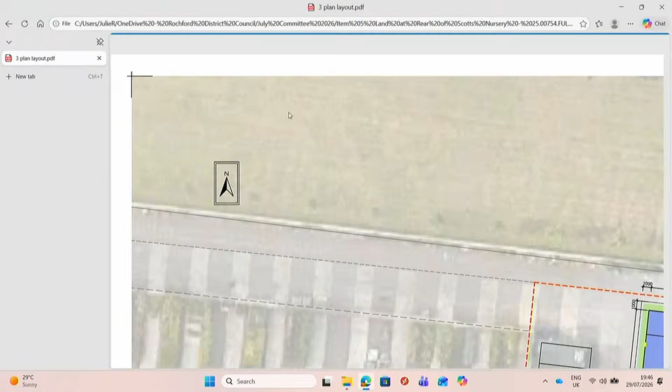And if we can jump to the three-plan layout, please, this is what's proposed. The blue areas that you see there - I'll try, Chair. Yeah? Okay.

What concerns us here is the planning application made for the access areas you can see in the grey triangle-y area at the bottom. But what we're interested in is the 5 blue rectangles, which are the paddle courts, which is what's proposed. These paddle courts are enclosed, which I'll go into. But bear in mind the location of those paddle courts as we go through the slides in relation to what you've just seen - the area at the back of the site in sort of casual storage, and the next slides to follow.

The whole site is located within the Metropolitan Green Belt. Although the provision of outdoor facilities for outdoor sport and recreation are generally permitted - we've seen these things before this committee many times, things like equine uses, football, cricket, other sports uses - to permit a recreational use in the green belt has a caveat that it should preserve openness. So in the case of stables, you get all the grazing land that keeps it open. In the case of playing pitches, you get the grassed areas, the playing field, lost only by the clubhouse, changing rooms, car parks and things that might come with it.

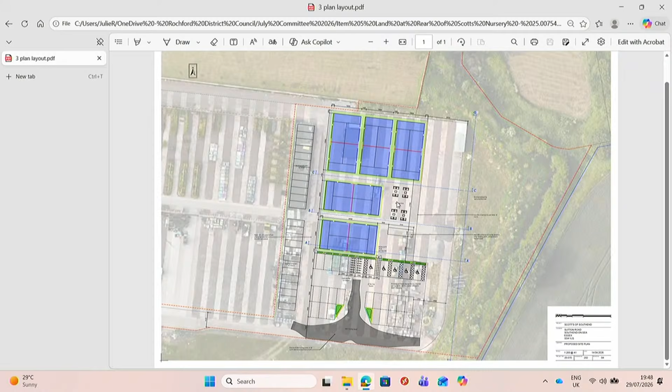If we can see the four plan elevations, because we base our decisions primarily on a plan, hopefully this will come through. You'll see that each paddle court is contained within a glass and mesh structure - the top of the structure is mesh, 3 metres in height and 4 metres in height at the ends, where there's probably greater chance of bounce and overrun.

So each court has this sort of compartmentalised arrangement. The applicant, looking at the issues raised by officers, has reduced the scheme from what was 7 to 5. He's trying to meet our concerns, but you'll see from the analysis that officers still feel that this is inappropriate development.

If we can jump to the visual from inside, this applicant has been very helpful, not only with the aerial photographs, but they've produced these images. This is what it would look like, or is imagined to look like, inside the scheme if approved. You've got the AstroTurf surface, and each court has its own structure around it in a framing, steel framing, glass surround. The mesh at the top, which is in the drawings, isn't shown on these images. But what you have got is the extension of some of the framing to form the light columns, which you'll see peering above the overall height.

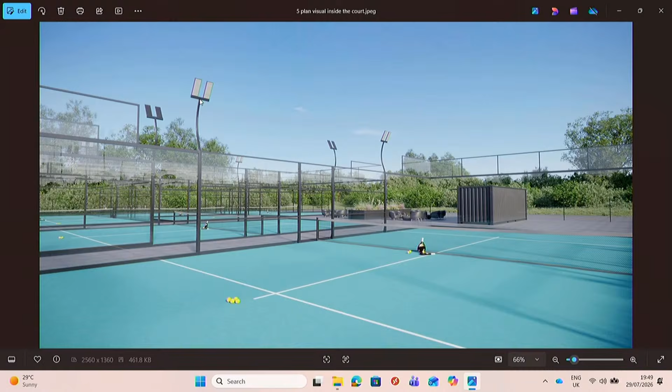If we jump to plan 6, it's just another visual. It takes you to the seating area, where there's also a container, presumably to put various bits of equipment and stuff. So you'd have this arrangement probably where players wait till their court is available, or socialise, or whatever.

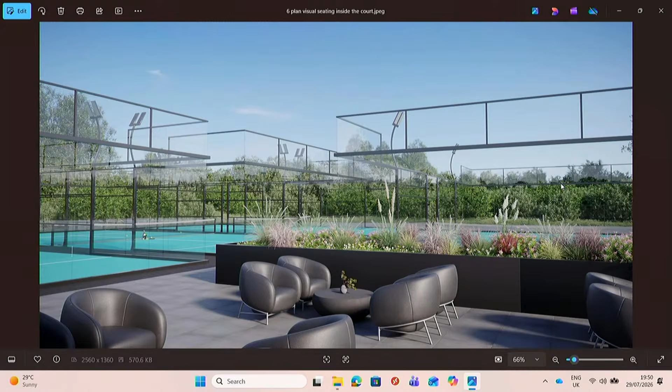If we can go back to the aerial image of proposed, please - sorry, that's plan 7. Now, having looked at an aerial photograph as it is now, this is their impression of what it would look like if it was approved and built. You have the existing containers to the western edge, and then you have the proposed area here, the surface, the car parking, the single container, and the seating area that we were looking at. So what's before you for consideration is these blue surface court areas with their own enclosures.

Members will see that the applicant has also submitted favourable decisions from other councils, set out by the case officer in the report, that depending how you read them, you might think support the applicant's case. But in looking at them, officers have concluded that they were either related to existing sports facilities - say this was a sports centre, and it was just a further addition where the recreational uses were already present - or they were smaller in scale, or very close to existing built form, perhaps on the edge of something else. That's not the case here. This site, although it's next to a garden centre, is in the middle, as we saw on the first location plan. As such, although they are material, and it's up to what weight officers and members may give to that, officers have been clear that they're of limited weight in the assessment.

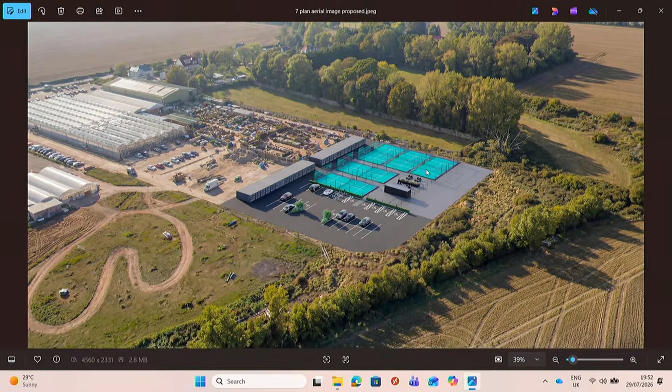To all the members of the committee, thank you for the opportunity to address you in support of this application. My name is Bailey Alston and I'm the applicant for this proposal, and I'm here this evening to ask you to grant planning permission for the development. The proposal before you has many benefits, and members will be aware that in coming to your decision you need to weigh these against the perceived harms of the scheme. The scheme seeks consent to build 5 paddle courts on the existing hard standing at the rear of Scott's Nursery and retail outlet. As your officer's report confirms, the proposed use is for outdoor sport and recreation, which is not inappropriate in the Greenbelt.

It is worth noting that the National Planning Policy Framework and associated guidance, upon which you will make your decision, contains no specific guidance as to the exact type and nature of outdoor recreational uses which can be accommodated, and whether these should be public or private ventures. The courts will be open to the public between the hours of 7 a.m. and 10 p.m. on a full pay and play basis. The courts are fully accessible for all age ranges and can accommodate a range of disabled users. The proposal would initially generate multiple new full-time jobs in the area, with potential for further coaching and teacher roles as the business becomes established and grows. Paddle is the fastest growing sport both in the UK and globally.

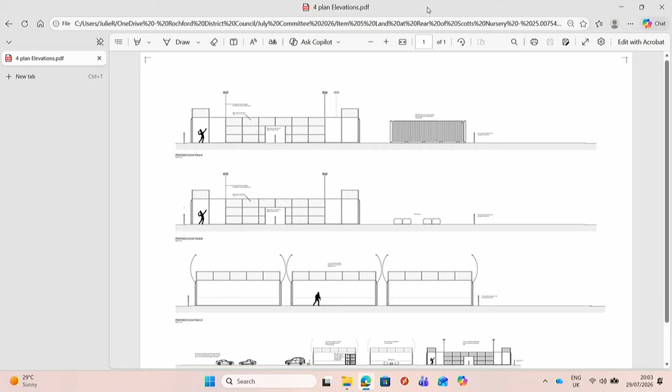If we could look at the first image, I think it's Plan 2, the one showing the storage as it already exists. The extent of the approved sales areas covers the buildings and the open displays in front of the canopies - if Julie can go to that area there, that's the approved sales area. This is open storage, just hard standing behind, which is what we're talking about. Those storage pallets or piles of earth don't have real permanence. That's the issue for officers - when you put structures on land, they're permanent, they're bolted to the ground.

There is a slight confusion that the plans we just saw, don't go back to them Julie, that's what you're approving and they show framing. Yet, as the speaker did say, the visuals show glass. Now, if members were minded to approve it, you might wish to have plan details of the glass structure, which is less heavy than the framing that's been submitted with the planning application.

You mentioned urbanisation effect. This isn't a housing area, but development like industrial units, airports, air terminals, things like this, housing areas - they're all part of, if you like, urban development. Even sports facilities are a form of urban development. That's why we use the general term urbanisation.

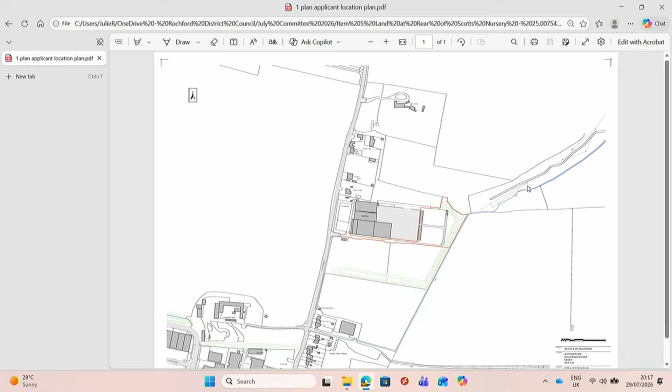Because if that floods, if it goes to next door - we're looking at different weather, climate changes in the future - if it goes to next door it will be a complete flood on that grassland and won't be able to use it. That's the reason why I brought it up.

It says the development therefore fails to meet the requirements of paragraph 154B or paragraph 154H(v), and cannot be regarded as appropriate development in that regard. Could you explain what those paragraphs are, please? Thank you, I'd have to look it up, Chair.

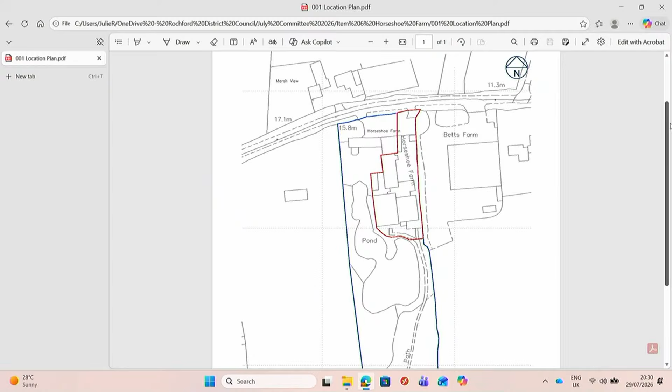Thank you again, Chairman. If we could start with the location plan, just to familiarise members where we are. It's on the southern side of Lower Road, about a mile east of the junction with Church Road in Hockley. If Julie can just follow the cursor around the outline of the site, please, just so members can see.

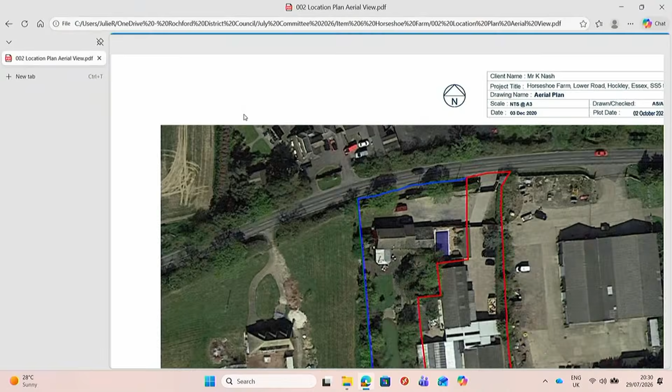If we can now switch to the location plan aerial view - on the site are a group of former agricultural and equestrian buildings, which since the 1990s have been used for storage uses, and more recently lawfully authorised for mixed purposes, including manufacturing, research, as well as offices. The site is within the Metropolitan Green Belt, and the uses and buildings on the site constitute previously developed land. You've got buildings here in use, and that is PDL for the purposes of green belt policy.

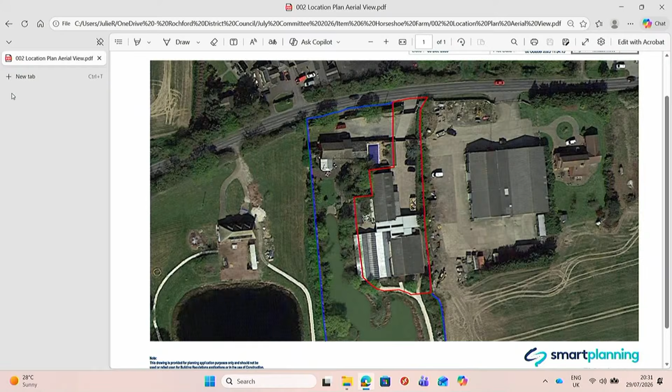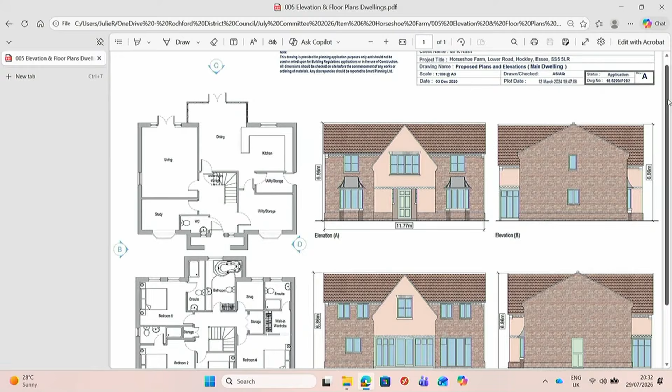If we can just quickly look at the elevations and floor plans, you see it's rare for a developer to come to us with 4 identical houses. That's not necessarily a bad thing because it gives the development identity. These, I think, are quite welcoming in that the design features this architectural cross wing through the building. It has a central entrance feature, which you'll see in a lot of urban areas, focusing the best design on the front. But this architect has carried it through and shows it on the back as well.

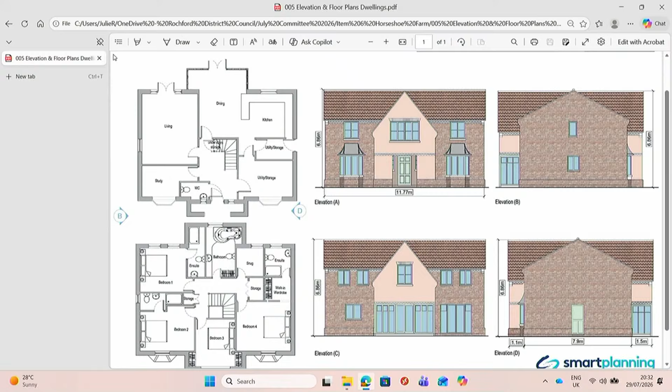If we can see just the triple garage and then go back to the site layout, please. Because the site is previously developed, that part of the policy takes us in a certain direction that we actually touched on in the previous presentation. So it becomes appropriate: the swapping out of one kind of built form and use for a different kind of built form and use. It doesn't have to be residential, it's appropriate because you're dealing with harm to the green belt that's already there.

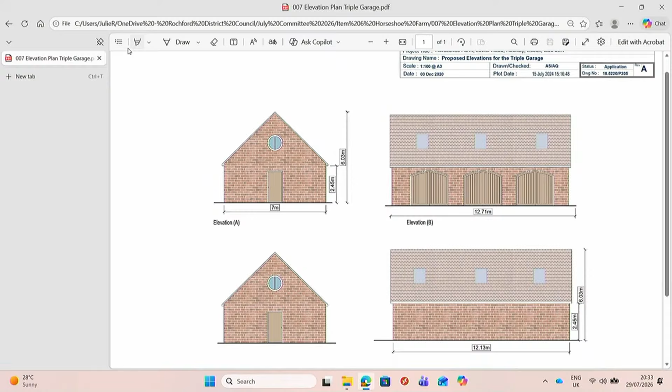So by taking what's there away and putting something else back, particularly if it's deemed to be better, which you'll see from the officer's report, there's less floor space and less volume here. And there's more space between the houses proposed, or would be if they were allowed. So instead of having a big mass of former agricultural industrial buildings as one big imposing mass, what you'll have is less mass interspersed with space between, which is better in officers' view for openness.

So you'll see that the homes, as I said, are good design. They range between 135 and 184 square metres in garden area, well above your standards. They have a good relationship with the neighbouring dwellings, again, because they're in a spacious location. They meet the parking standards, and therefore the recommendation is approval subject to the conditions set out in the report.

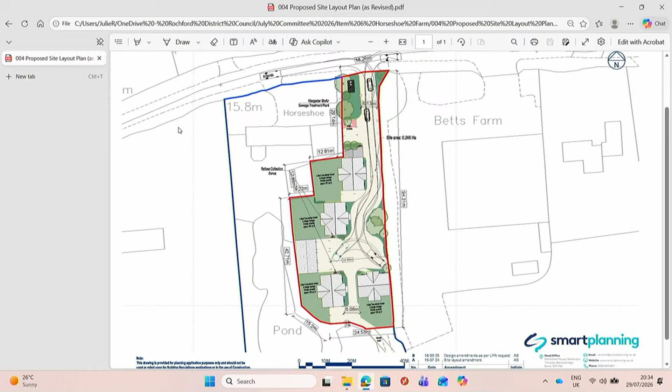Canopied bays are provided to the front elevation for detail and interest. Glazing to the rear is an attractive feature and allows for light to pass into the main living areas. Large private gardens are provided, along with landscaping proposed as part of the ecological submissions, resulting in over 150% habitat improvements over the existing site conditions.

The site is previously developed, with a number of large commercial buildings and hard surfacing, all in commercial use, certified as lawful in 2021. As the site is previously developed in the Greenbelt, paragraph 154 of the National Planning Policy Framework applies. Whilst development in the Greenbelt is normally considered inappropriate, a number of specific and important exceptions apply. Relevant to this application, Criteria G specifies one of these exceptions as limited infilling or the partial or complete redevelopment of previously developed land, whether redundant or in continuing use, which would not cause substantial harm to the openness of the greenbelt.

There are two limbs or tests set out in this paragraph. Firstly, the site must constitute previously developed land. The site in this instance is previously developed and therefore passes this test. The second test may then be applied and provides that the development should not cause substantial harm to the openness of the greenbelt. In this instance, a significant reduction of built form on the site is proposed. Indeed, the scheme reduces the volume and built form by over a third compared to the existing buildings on the site.

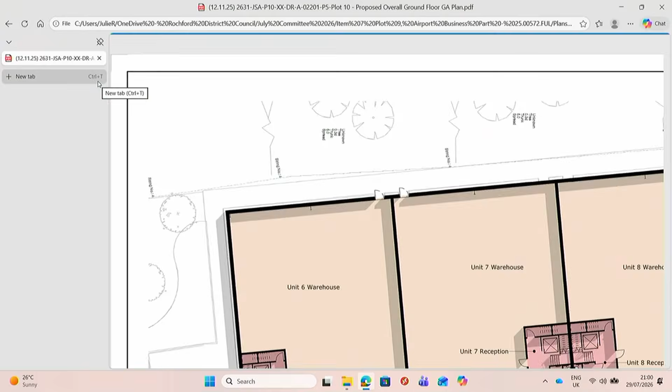There should be a PowerPoint. There should— Yeah, you can go to slide 2, that's fine.

So slide 2 here shows the extent to which the land ownership of the business park extends. Obviously, the ownership extends in a small strip to the northeast, around to the west along Cherry Orchard Way, and extends across the southern edge of the site alongside Aviation Way. The site itself, where Julie is currently showing, is around 1.7 hectares within the wider airport business park complex.

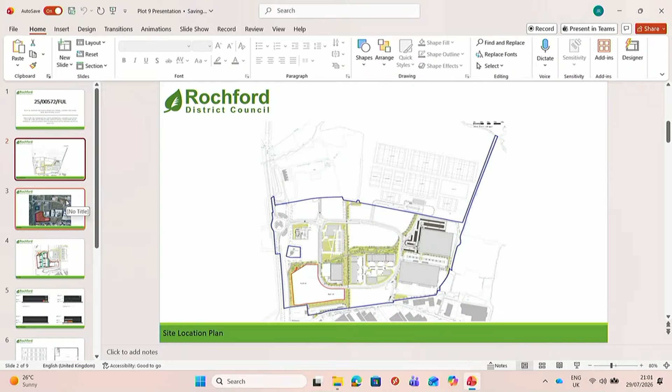The site is located to the southwest of Rochford, to the north of Southend, with access to the strategic highways network, primarily the A127, to the south within Southend. The Southend Airport Joint Area Action Plan, Policy E3, sets out the desired use of the wider business park site. Policy E3 sets out that B2 developments may be accompanied by ancillary storage and distribution use. This would include a degree of B8 use.

Next slide, please. So this slide shows an aerial view of the site, primarily showing how the wider business park is being built out on a plot-by-plot basis, with additional undeveloped plots located to the north and to the east. It is worth noting on this slide the location of the listed building known as Cherry Orchard Farmhouse. It's highlighted in blue there, where Julie's mouse is currently. This is some 50 metres to the north of the site and is a similar distance to that of Costa, also located an additional 50 metres further to the north.

As identified within the officer's report, a level of less than substantial harm has been identified to the designated heritage asset. However, when weighted against the benefits of the proposal, the creation of needed business space, the existing erosion of the character surrounding the listed building, and the provision of employment opportunities, the development is considered to provide benefits that outweigh the harm identified by the heritage officer.

It is also noted that within the preamble for Policy E6 of the action plan, that a landscape buffer to Cherry Orchard Farmhouse is to be provided for any development that comes forward. And as can be seen in the addendum provided to members, a robust landscaping condition addressing soft landscaping details has been provided, as well as noting that an existing buffer to the northeastern corner is to remain, with the public footpath also crossing across this space.

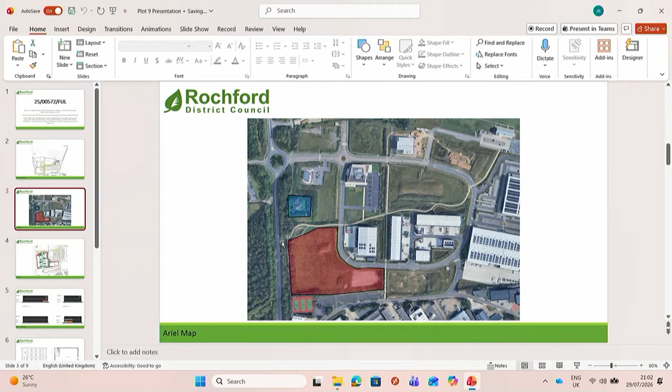When looking at the proposed uses and their alignment with both the area action plan and the council's own economic development needs assessment, it can be seen that the B8 use, whilst mentioned in an ancillary manner to B2 in the action plan, is not explicitly set out as an acceptable use on its own. The proposal in this instance could form a complete B2 use, which would accord with the area action plan, or a complete B8 use, which would conflict with it.

Officers have considered, however, that given the need for B8 uses as set out within the development needs assessment, the use considered on its merits, the proposed development is sited in an appropriate location that would accommodate a B8 use, also enabling flexibility to facilitate the B2 use also proposed.

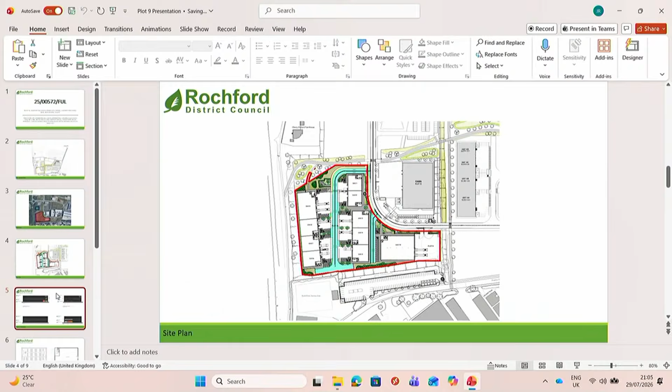Next slide, please. The next few slides will show some of the design features of the building as well as their layouts. As you will see, the buildings proposed are much the same in their finish and layout, with an open plan ground floor and a small ancillary space at the first floor level.

Plot 9 of the business park includes the largest of the units, Unit 10, which is to have an internal floor space of approximately 1,528 metres squared. The smallest floor space units on the site are Units 1 and 2, both having a floor space of around 414 metres squared. The total floor space on the site is to be around 6,500 metres squared.

The buildings themselves are to be approximately 10.7 metres high at parapet height, with the first floor level at approximately 3.7 metres. All 4 buildings on the site are to be the same height and floor levels.

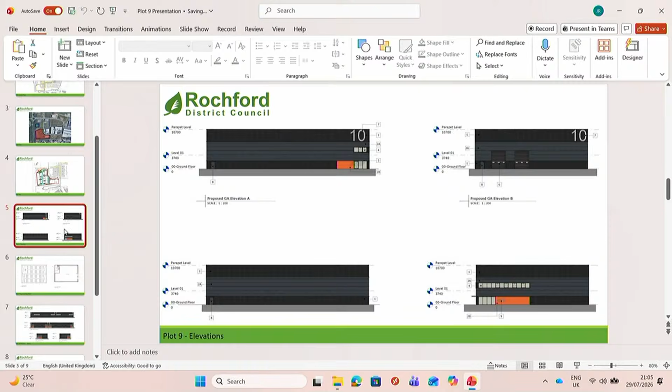You can just flick through the next few. The buildings are to utilise composite cladding for the walls in a dark grey/black finish, with elements of orange at ground floor level to break up the massing and provide an identifying feature showing the accesses to the units. The units are to have a shallow pitch to their roofs with a parapet surrounding them, which will help limit the view of solar panels also proposed on the roof, and will enable the buildings to be similar in nature to those already existing within the business park.

I'd just like to, before I conclude, confirm a point of clarity. There's a reference in paragraph 30 to the Development Management Procedure Order as 2010. This is a typo and should have read 2015.

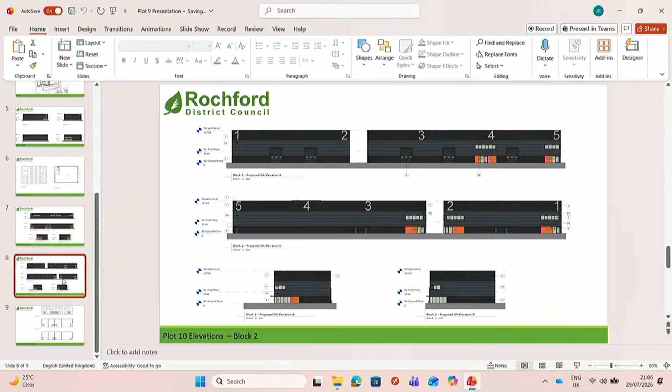So, just to close, Chairman, this application is therefore recommended for approval, subject to the conditions set out within the published committee report and as amended on the published addendum, and subject to the completion of a unilateral undertaking to secure contributions towards biodiversity net gain monitoring and the travel plan.

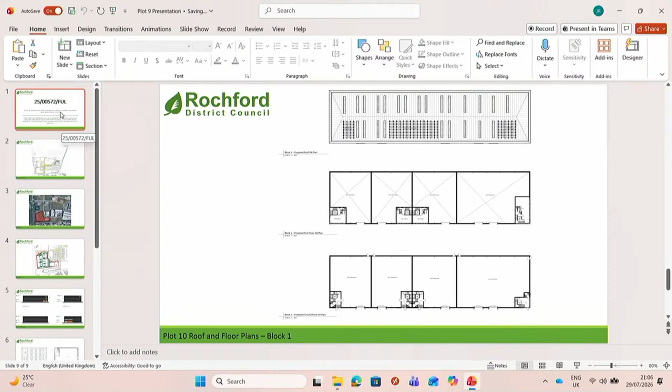Thank you, Chair and members of the committee. I'm Olivia Docker from Boyer Planning, and I'm speaking on behalf of the applicant, HBD. We have worked closely with your officers and appreciate their continued support and recommendation to approve the application.

HBD's proposals are for the erection of commercial units on undeveloped land at Airport Business Park, known as plots 9 and 10. The new commercial units will provide high-quality employment floor space for either light industrial, general industrial, or storage and distribution uses. By providing modern employment floor space, the proposals will help meet the needs of existing businesses within Rochford and also help attract new businesses, delivering new jobs and economic growth.

The proposals will build on the ongoing success of Airport Business Park, which has already delivered approximately 370,000 square foot of high-quality commercial floor space. There has been strong uptake across Airport Business Park, and the proposals will bring forward additional employment floor space that meets current and future demand and will support inward investment into the area.

HBD have worked proactively with your officers to respond to comments raised, resulting in a high-quality scheme that ensures the proposed units are in keeping with the existing buildings at Airport Business Park. The proposals have also been sensitively designed in the context of the Grade 2 listed building, Cherry Orchard Farmhouse.

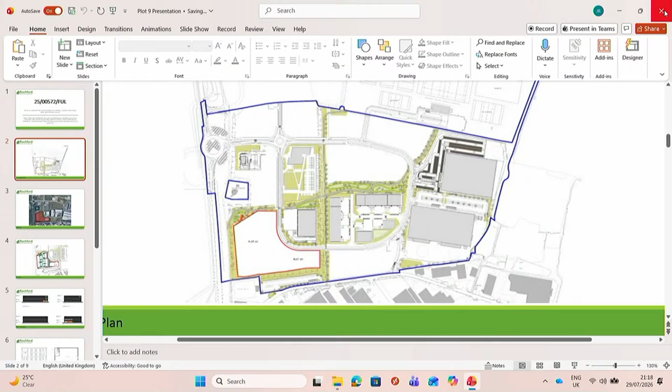Don't see any other members indicating. Members, it's proposed that the committee resolves to approve planning permission subject to the applicant entering into a unilateral undertaking with Essex County Highways to provide the following heads of terms: one, travel plans, £7,269; two, habitat management and monitoring, £8,170; and subject to the conditions on pages 90 to 95 of the report and on pages 3 to 5 of the addendum.

Sorry, my brain's gone dead. Do I have a second for that, please? Councillor. Those in favour, please. Unanimous. That is unanimous. Thank you, members. That is agreed.

Moving on, members, to item 8. Are you taking these, Mike, 8 and 9 together? I would prefer to, Chairman, to save time because they're identical, if you're agreeable with that. Okay, members, we happy with that?

Thank you. Just to clarify that point, members, this is one of these applications we get which is for the same development, but because of the way the legislation is framed, you get a report on a planning application, the FUL, and you get the accompanying listed building report, LBC. So you've got two reports there, 8 and 9, with a slight variation in that the LBC deals with conservation matters, but basically it's the same scheme, and the merits of the report are such that I hope to deal with them together. This site is the former council offices on the east side of South Street, shown on the screen there.

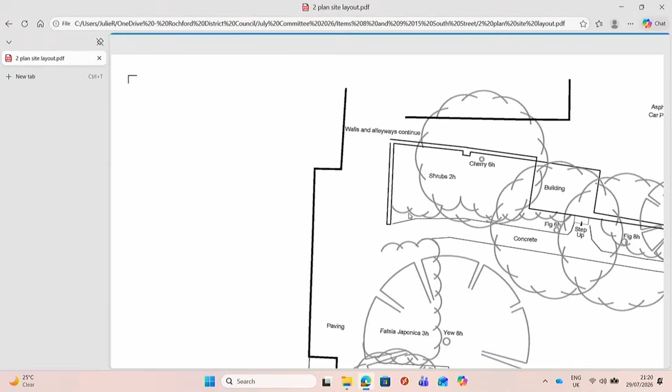If we could jump to the second plan, please. You'll see this is a simple proposal to provide a garden wall, and if Julie could follow it with the cursor for members to see. I don't know if you can expand that a bit. Yeah, that's good, okay. And you'll see there's an elevation detail that, as I asked for it to be expanded, is missed. But yeah, that'll do.

The issue is that 17 South Street, the old house, will continue to, or is foreseen to continue, as a venue for weddings and such like. And what they need is an outdoor space. So at the moment, the gardens left over from the office days were communal. There's a wall further up, but what they propose to do is create this space by putting a wall across the existing lawn area.

And you may see in the detail that at the wall ends there is a timber fence. The reason being is because there's quite decent trees at each end, and obviously if you put a timber fence with sinking posts, you do less damage to the root plate of the trees. So it's all for the good of retaining the trees long term.

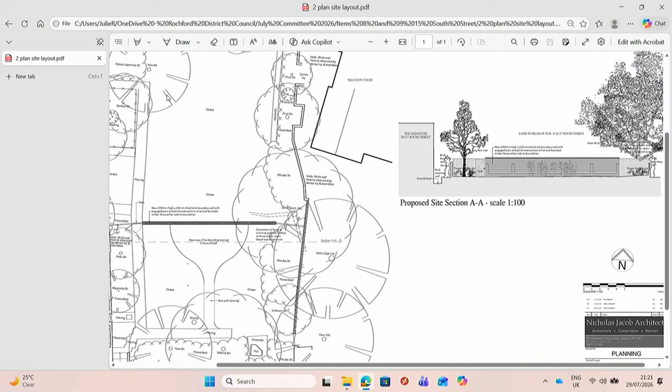So it reinstates walling, not necessarily in the same position, but formerly, before the council took them over as offices in the 70s, these were substantial houses, and therefore they were likely to have various walls for their own garden areas. This reintroduces a wall and fence detail. I'm not saying it's in the same position as it used to be, but it's a residential type garden wall in the garden wall bond, and the fence panels are vertical in a traditional style, and they're necessary because of the trees on the end.

There's the typical detailing, if you can see it. I don't know if you can zoom in on the brickwork, Julie. But there's no heritage objections, they're all in support of it. There's no objections from the council's arboriculturist in respect to the trees. It's been done with all that in mind.

It's a council scheme, so the recommendation is on the planning application to approve, and then on agenda item 9, the listed building application, the same, to approve that. Thank you, Chair. Thank you. Councillor Marriott, please.

Will the fencing and walls be within keeping with the area? Chairman, the brickwork is going to be an orangey burn. Members may be familiar that Rochford, from the Cherry Orchard Works and possibly Star Lane, when fired, that local brick takes a very orange hue. It's characteristic of Rochford. No longer are those bricks produced locally, but the agents for the council are sourcing a suitable brick that the conservation advisors at county are happy with to reflect that local design and style and vernacular. Okay, thank you. Councillor Stanley, please.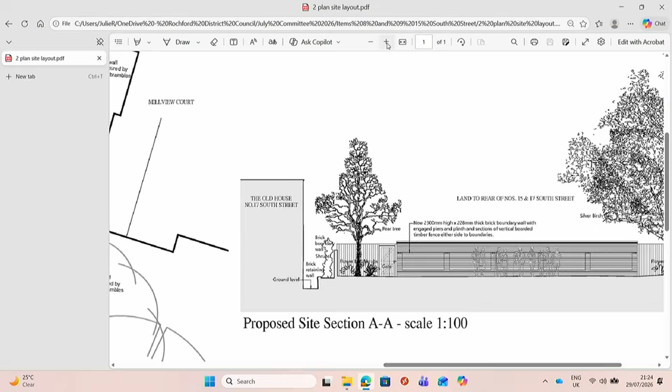Chairman, we're working on that. The middle plan that I showed, that's coming up before you now, shows buttresses as opposed to piers, which are the sort of spinal supports that come up on the wall. If we can zoom in on the image, you may just see those ghosting through those lines. I don't know if you can follow them on your cursor, perhaps, just to highlight to members. But it has the piers you're requesting, it has the strengthening spaces that a wall should have.

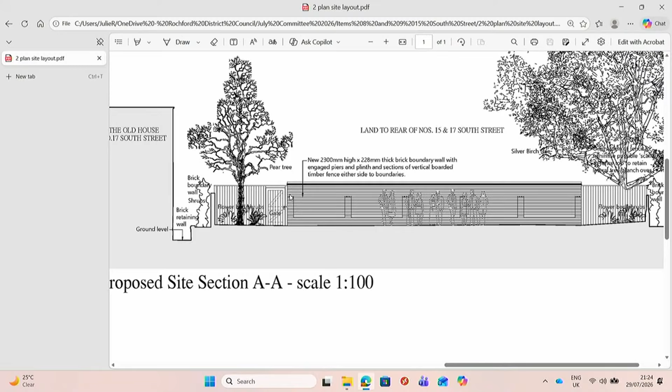The reason that I asked that is that because of the elevation of the area and how windy it gets, we need to make sure that the structure is sound. Even after 2 or 3 years where the weather has got at it, we need to make sure the structure is sound, because if it's going to be used as it says in the way of flats and what have you, it's a dangerous situation that could actually fall down and hurt somebody, rather than ordinary panels, wooden panels, you can get away with that, but when you've got a wall this size, it needs to be constructed really, really well.

Thank you. I don't know how many of the councillors here have ever been in the back garden. I believe Councillor Hoy had, and you have, so you'll know how the brick walls at the back are built. And I believe that what they're doing is trying to replicate those, so it's all within keeping.

Mike? Chairman, if it helps, on the screen you'll see that they've helpfully done a foundation detail, and you'll see at the bottom the wall is slightly wider to take the loading and the stresses, and then with the buttresses that we mentioned earlier, and then the bonding pattern, garden wall pattern, like the walls that are there, it follows through. So I think, as far as you can from a planning point of view, you can be confident that it'll be robustly built. You'll see the depth of it, the foundation in the ground, and the brick coursing going down into the ground as well. Councillor Reeves, please.

Thank you, Chair. Maybe I'm being a bit nitpicking, but the Essex County Council Place Services contribution to this, with the age of the building that is actually next to it, I'm rather surprised that they haven't mentioned anything about any sort of relics that might be found there. It is a very, very old building, and that foundation looks like it's going to go down quite deep.

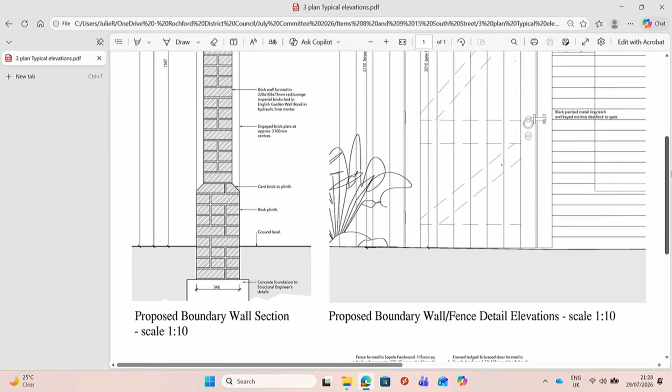I'm not a listed building specialist, but I think what they're speaking to is that prior to office conversion, these were houses. They were of some note. I think one of them was a doctor's surgery. My dad gives me stories of when he had to go there once. But the fact that they were residential properties, they would have had walled gardens. A lot of the Victorian houses are famous for their walled gardens, and these walled gardens are extensive. But I think what happened either before conversion or at some stage, maybe the individual walls and fencing, if that was fencing, were probably removed.

What this does from a significance point of view is put back a domestic feature. If these are returned to dwellings, it puts back a wall and fencing of a suitable design, therefore returning the significance of the layout as a domestic setting. What I can't promise is that the alignment of the wall is in exactly the same place as it may have been historically. Archaeological excavation might find the wall or remnants of something else. So that's what they're aiming at, trying to say that by approving this, you're not harming the significance, you're improving the setting of the listed building. But that's probably as far as I can go on that specialism.

Councillor Stanley, please.

I'm going to ask about the location and the areas involved. When it was single properties in a terrace, the brick walls separating the gardens were very low indeed, with wooden posts and wooden panels above. Would that not be a more sensible way of dividing the area, exactly as it was originally, rather than a 2.3 metre brick wall, which is over 7 feet high, just to separate the areas? Wouldn't that be a better and easier solution, since brick walls tend to fall down quickly with weather, whereas going back in time they used to have very low walls, only about 3 foot high, with a fence above and wooden posts in the walls? So that's all I'm asking, would that not be a better feature than this? I know they put the application in for a wall, but if we're looking at historical areas, and this is a real historical area, perhaps that should have been looked at previously.